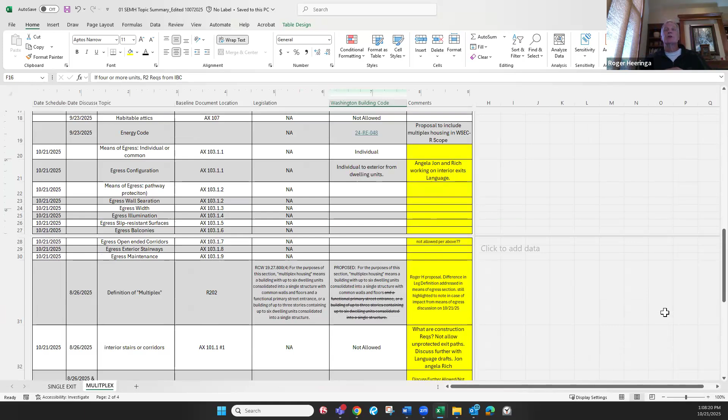That document was posted, and my suggestion is that we go through the goal, concepts, and issues that John and that group put together, and then we can go back and revisit the topics log, because I think we will basically knock off a bunch of those if we can go through the overall topics. Does that make sense?

So, John, would you be willing to walk us through that document if you bring that up, Dustin? Sure. John, would it help if you drive that, or you want me to drive it? It'd probably help if you drove it. I'm in a hotel room, so. No worries. All right, here we are. You want me to go, and I'll move around. Okay, thank you. Yes, and I will leave my camera off for the same reason, with apologies.

Okay, so the three of us sat down and discussed some of these already, and we have some recommendations included, but we looked at what we are trying to accomplish here. The original proposal had just exterior exit balconies and exterior stairs, and there was a desire expressed in one of the meetings that we include interior stairs as well. So we wanted to go ahead and figure out what we need to get interior stairs in addition to the exterior. But we still want to provide adequate safety, and at this stage, that's part of the question here.

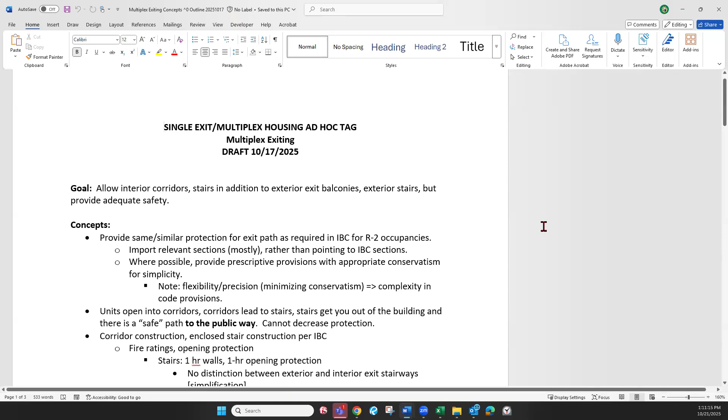What we are aiming for in that first concept is to provide the same or similar protection for the exit path as is required in the IBC for R2 occupancies, for apartments. We've only written a little bit of the language, and we ran into some questions and concepts that we figured we should get buy-off on before we actually start writing language, because that could save us a whole lot of time. That's what this document is about: exploring concepts and issues we need to decide before writing code language. So the concept is we're going to require exit paths as in R2s, and import the relevant sections rather than pointing to the IBC section, since that was an objection before.

That's part of the question, because it is going to add quite a bit. Where possible, we said we wanted to provide prescriptive provisions with appropriate conservatism, and appropriate is obviously up for discussion. But this would be much simpler. Otherwise, you start adding lots of language. If you want flexibility and precision and minimal conservatism, you increase the complexity of the code provisions. So one concept we'd like guidance on is: are we looking for maximum flexibility or maximum simplicity? You can write prescriptive provisions with some appropriately conservative minimum, and you just meet that. If you want to do something different, go to the IBC.

The next concept is a base concept for exiting in the building code: units open into corridors, and corridors are protected. The corridors lead you to stairs, which are even more protected, and then stairs get you out of the building. And different from the IRC, you're also getting a path to the public way. The IRC exiting provisions pretty much stop at the door, so we are anticipating incorporating some exterior pathway elements. And the idea is that you can't decrease protection. You can't go from a rated corridor into a protected stair and back into a non-rated or less protected corridor, or some unrated room. That's very much a base concept in the IBC.

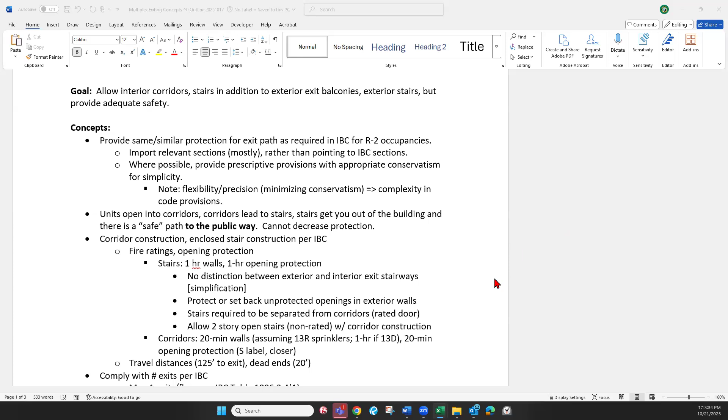Then getting to some of the details. Again, we're saying the corridor construction and enclosed stair construction is going to be pretty much the IBC provisions. So there's going to be some fire ratings. There's going to be opening protection for stairs. So here's one of the potential simplifications: all stairs are 1-hour walls and 1-hour opening protection, 1-hour doors. And we're not going to make a distinction between exterior and interior stairs.

And the simplification here is that with exterior stairs, you have to start defining how big are the openings, how exterior is exterior. And so in this way, we can also simplify some of the protection. But again, these are items for discussion. We're going to say for stairs, you're going to protect or set back the unprotected openings in the exterior walls from the property lines. So we don't want a fire next door blocking your exit. And there's something, we'll come back to that in just a sec.

We're going to say the stairs have to have a door between them and the corridor. Again, this is a simplification, or could be viewed as a simplification, and we can talk about some of the details of that. And then we're going to allow, as the code does today, 2-story open stairs that are non-rated, but they're corridor construction. So you can have 2 stories that are open to each other and only have corridor construction. You don't need the 1-hour stairs. That's something that we came up with in our last meeting with Rich and Angela and me.

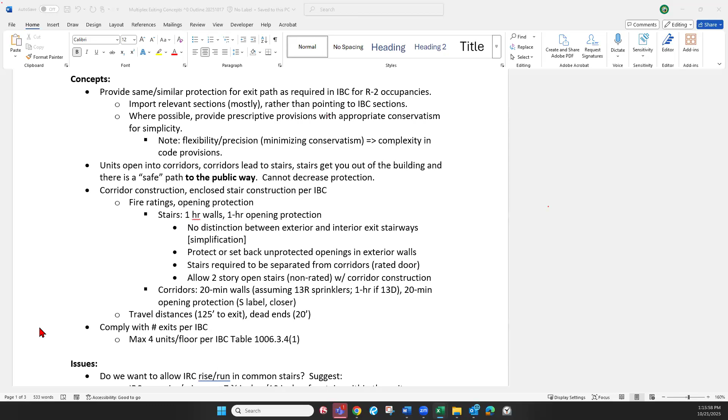And then the doors to the corridor, so these are your unit doors, we're saying are going to be 20-minute opening protection. And the S label means that they're tested for smoke, and they'll have a closer. And the idea here is that you're still trying to preserve the corridor environment. That's supposed to be what I call a pristine environment. So smoke-free as much as possible. You're going to obviously have some smoke on the fire floor because someone's got to get out the door. But once that door closes because of the self-closer, then the idea is that you don't get a lot of smoke in there, and you protect the other units from the smoke.

We're maintaining the current code travel distances of 125 feet to an exit from any point in the building. And then if you have a dead end corridor, that's going to be 20 feet long. The other thing is there's a little bit of discussion. Right now we're saying, okay, you just comply with the number of exits per the IBC. And that means it starts off by saying you've got 2 exits, and then you can have a single exit if you have a maximum of 4 units per floor and a couple other things. This kind of bleeds into the single exit discussions, but we are not proposing to refer to the single exit appendix at this stage.

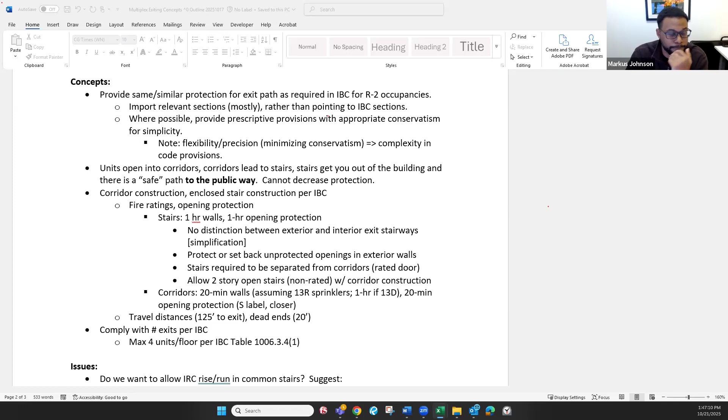Okay, Richard. Yeah, thanks. Just real quick. I had made a comment about, this is what an apartment building looks like, but I want to be careful to say that what we're really trying to do here is simplify the requirements of the IBC in terms of the way it's presented, right? And we're not trying to provide pointers to specific section numbers of the IBC. We're really trying to lay this out in a way that allows people to figure out what they have to do without always pointing back to the IBC.

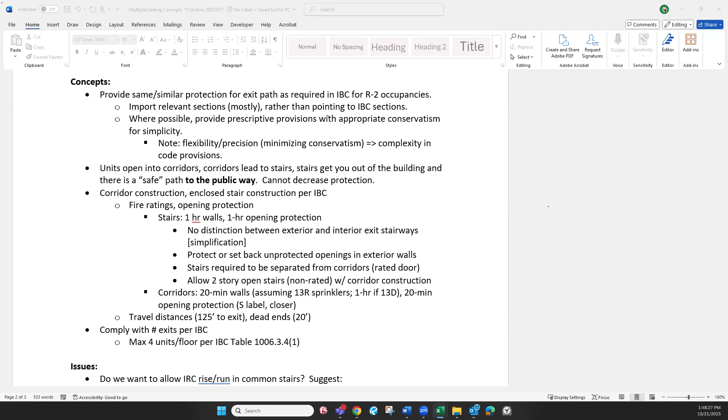And John, you might correct me on this. I don't know if we'll ultimately end up with some pointers, but we're trying our best to lay this out and provide language that's more aligned with what people are used to seeing in the IRC. Yeah, I think we're going to try not to rely on pointers as long as it doesn't get to be 5-6 pages long. Right. Okay.

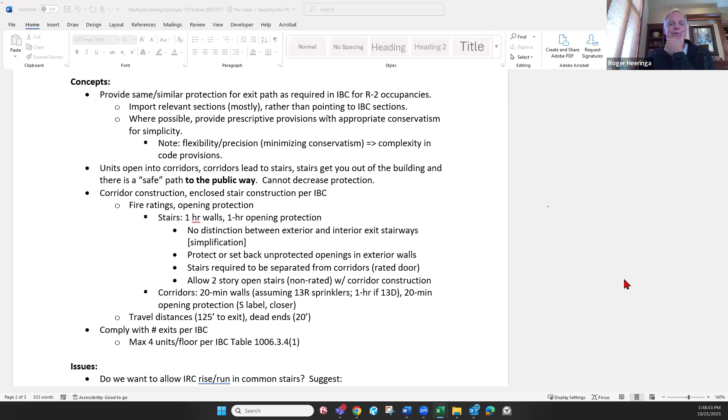I am curious what people think about how to proceed. I know there are 2 issues in here that do impact how we might go forward. One is the sprinklers and what was the other one? Common spaces. Common spaces, yes. I am wondering if we raise those 2 questions, have some conversations, and maybe make decisions on what we think moving forward.

Markus, go ahead. Yeah, can I suggest maybe we start with the common spaces, because I think we might have already settled pretty closely on the sprinkler requirement. I think we're saying that 13R is required in these buildings, or that's where we've been leaning in past discussions. I don't know if that's been finalized yet, but that's my memory. Yeah, I'm remembering the same thing. So I'm hoping we can finalize that. And yes, I was going to suggest we go to the common use spaces.

I know you sent an email, Markus, do you want to provide your thoughts on that? I actually don't have the email right in front of me, which might make this easier. But I did try to do some pre-thinking on some of the stuff I heard in terms of common space. Dustin, do you have that email? Yes, I'm pulling it up as we talk. If you guys want to keep it rolling, I'll pop it open. Okay. Cool.

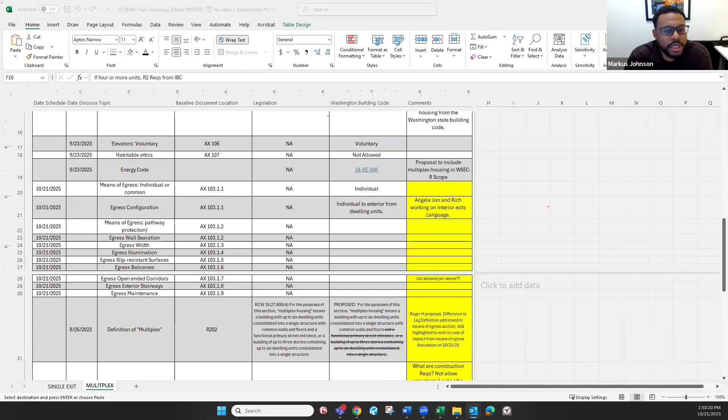So I tried to think through some of the types of common spaces that might have come up. Bike room or bike parking might have been one. Laundry room was one. Yeah, this is it. Thank you, Dustin. My initial opinion on laundry rooms is that common laundry rooms are just not built in newer multifamily buildings anymore. I live in a 320 square foot studio in a 54 unit building, a 2016 build, and I have in-unit laundry.

So it's pretty much common practice for new buildings to have in-unit laundry, and these multiplex units are going to be much larger than my apartment, so there's going to be space for that. Trash room could be up for consideration. I kind of think you could get away with all of these just not being shared, but I also respect the thoughts from previous conversations that trash rooms can generally be pretty small.

And, for example, in the city I live in, Seattle, it kind of requires 84 square feet for 2 to 9 unit buildings. So that's going to fall into this range. And so that's not that big of a space of building type of thing.

Storage room, again, my initial thought was just that these multiplex units are going to be quite large. I assume most of these are going to be 750, 800 square feet and more, essentially. So you're going to have space for storage in your unit type of thing. You're not going to be living in kind of the apartment that I live in.

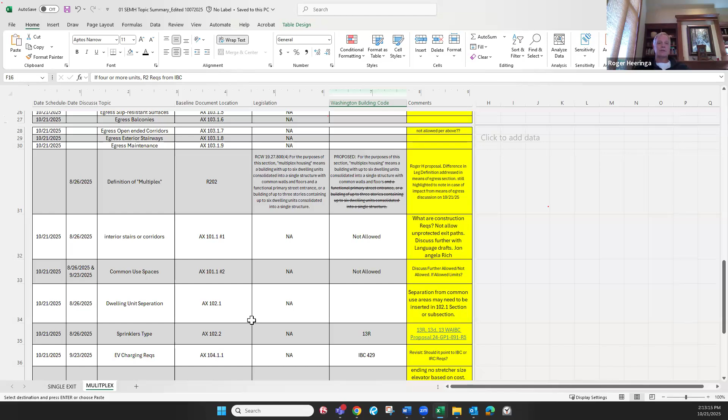So, yeah, real quick, Roger, I was just more worried about the outlets in the hallway, the exit passageway. Okay. Because if you have a 1 hour bubble and it's sprinklered, then you're containing it, and that's what we want. Yeah, no, it's just more about the hallways, because I've seen a couple of those, and that's the scary part, is when the hallway gets blocked with the fire. So no, if it's a protected trash slash bicycle slash mail room, that's 1 hour protected. Yeah, no, that's fine with the outlets.

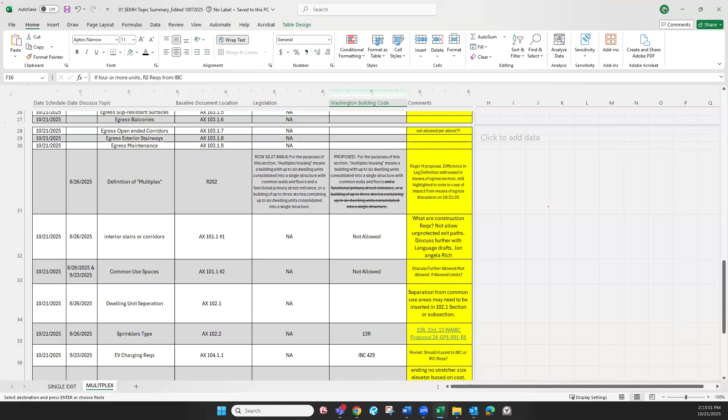Okay. John Sue? Okay, so I'm going to make your motion for you, I think. Would propose that we would allow those 4 uses. Laundry room, not storage. Laundry, trash, bicycle parking and mail. Right. To be included in the building, and those are the only uses other than residential that would be allowed within the building. With a 1 hour bubble around them, and we can figure what the details look like. But the idea is a 1 hour bubble.

time. John was correct in saying doors get propped open. And I'm just picturing that this door is going to be propped open most of its life, because people are delivering packages. They're trying to get their bicycles in and out of a door that's self-closing. It's self-closing and latching because it's an opening protective. Are people comfortable if this door is no longer self-closing and latching, or if it's propped open? Because most likely it probably will be.

John Sue? Yeah, Jeremy, I think the unfortunate reality is also the stair doors can get propped open too. You see that all over the place. Fair enough. I'm not sure this is a whole lot different.

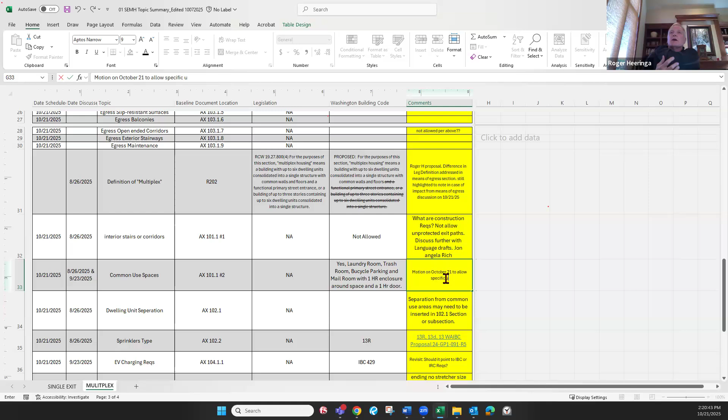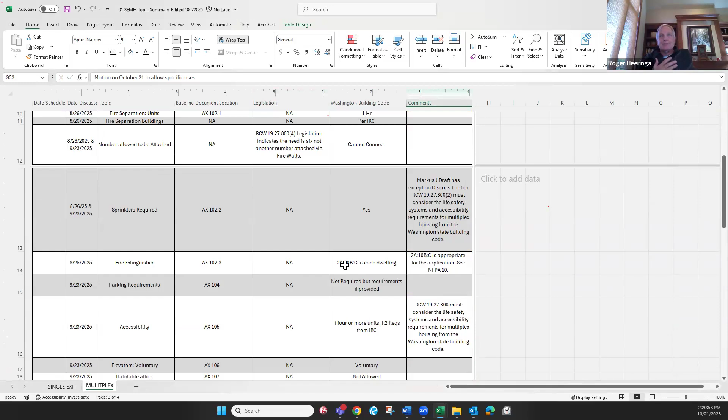We did talk about it 2 meetings ago, and I think that, I don't know, Dustin, if you remember, I remember, like Markus, that we had talked about it and thought we had decided on 13R, but we wanted to leave it open and have some additional discussions about it. And there was proposal 24-GP1-091 revision 5. Dustin, is there any way you can help us frame the conversation a little bit? We can. For the sprinkler stuff, looking at our line here, we have it, yes,

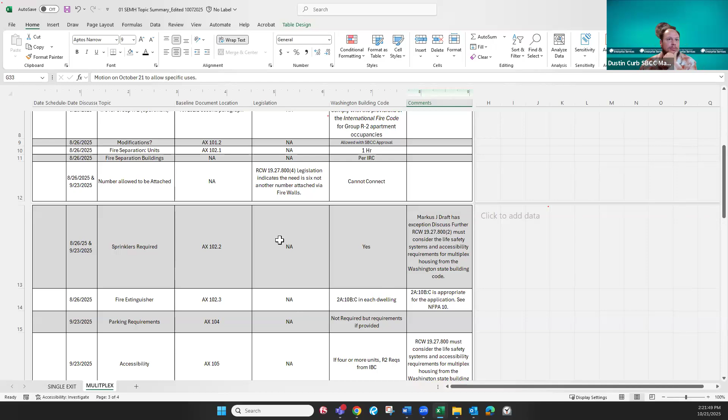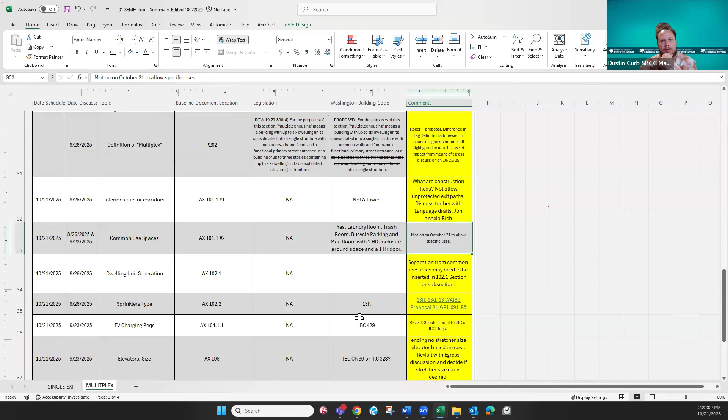I'm speaking based on the notes here. I guess our draft has an exception. Or, no, our draft doesn't have that exception in there. I do seem to recall, though, that we were leaning towards 13R systems over the full 13 systems. And beyond that, framing where we're at, I'll pause a little bit for Markus to speak and I'll keep on looking. Here's our sprinkler type. We've got 13R in here, but to check this proposal, let me pop it open.

Yeah, that's what I was thinking. So we've all agreed that it needs to be sprinklered. That was the yes, we agree that it needs to be sprinklered. There was still a discussion about whether it could be 13R, 13D, or if it needed to be 13. I think that we have it in there as 13R. The proposal is allowing a height increase for 13R systems up to 60 feet. Okay.

I think I understand 13R and 13 systems, because we talked about it on the single exit. Can somebody remind me what 13D is? It's for single family residences only. Okay. So it sounds to me like it would be 13R or 13. I don't think we would want 13D, but Markus, go ahead.

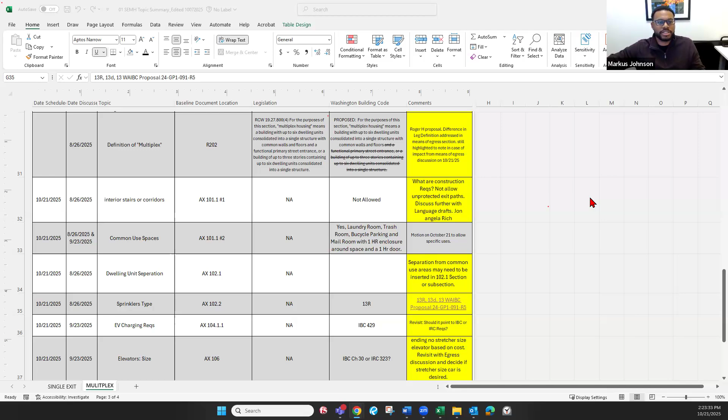Yeah, I don't know if this is exactly why it was still highlighted yellow to come back to. I feel like in the last meeting there was also discussion around a proposal saying that townhomes could do 13D, or 13D would be allowed in other circumstances where it's currently not allowed. I don't remember the exact details, and I'll let Mike fill in, because I think that triggered a memory there. Yeah, that was our conversation. I'll pick up on this one for you.

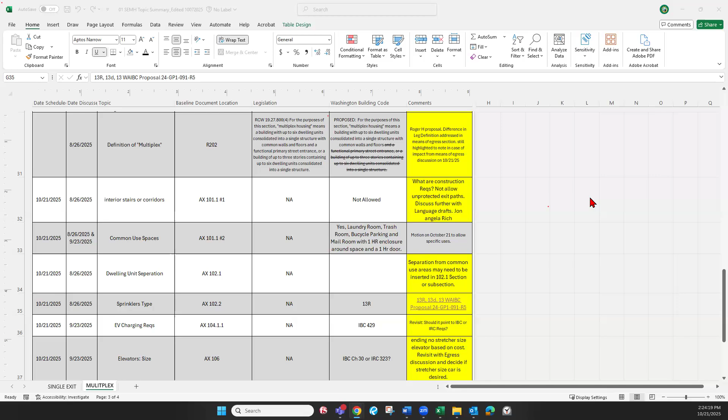When you're doing the townhome environment, with 5 units plus, you can stack them, and 13D is completely appropriate for those townhomes, because we look at each individual townhome as a 1 or 2 family occupancy. When we move into the multiplex like we're doing now, we start stacking those occupancies one on top of each other, and we need to move to 13R. I want to say that's what you're referring to, and if that's the case, you hit the nail on the head. That's exactly what we had mentioned. Okay. So given that, can I get somebody to make a motion that we require a 13R?

Jon Siu, so moved. Thanks, John. Can I get a second? Messer will second. Thanks, Mike. Any other discussion? All right, all those in favor say aye. Aye. Aye. Anybody opposed?

Okay, I am going to suggest we take a break until 2:35. We're about halfway through our meeting. Dustin, I think either during the break or right afterwards, let's go through our list here and kind of see, well, I guess maybe we need to go back to John's egress summary and kind of wrap that up. And then we can revisit all of the issues that are outstanding, the issue log, to see what's outstanding that we maybe haven't addressed by that.

So when we get back at 2:35, we will go to the document that John sent and walk through that and see if we've covered everything, or see if we can tie that up. So let's take a break for 10 minutes.

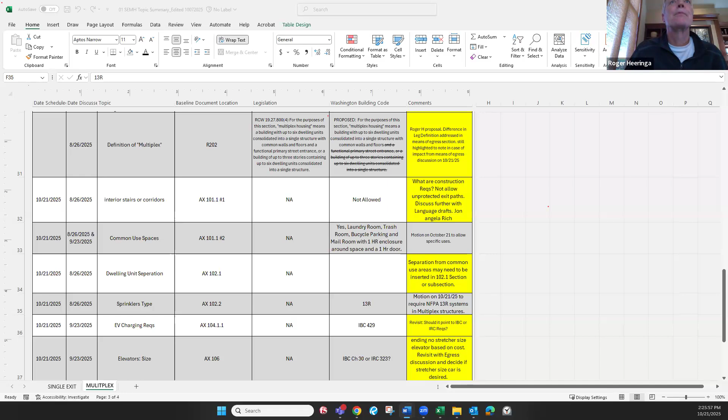For anybody that didn't have their sound on, the meeting is back in session. I'm going to ask Dustin to take a roll call just because this is a meeting where we're starting to take votes. So Dustin, if you can go ahead, and I am here. All right, give me one moment. I'm priming up my roll call sheet here. All right, Roger is here. Dan Young. I see him online. I'll return. John Hall. Present. Thank you.

Joe Mayo was not here earlier, sorry. Andy Lorenz was not here earlier, and I'm not seeing him online. David Kinley was not available. Jeremy Moore. Present. Thank you. Jonathan Goldsmith. Jonathan, I think I see you online. All right, I'll return. Robert Baglio was not here for the original roll call. I'm not seeing them online. Michael Wright. Present. Thank you. Jesse Bank was not here for the original roll call, and I'm not seeing online.

Shweta Sinha. Here. Thank you. Mike Messer. Present. Thank you. David Lynham was not here for original, and I'm not seeing them online. Rich Geisky. Present. Thank you. Spencer Gardner was not available for the meeting. Derek Weigel. Derek, I see you are unmuted, but I'm not hearing you. I'll come back. Richard Williams. Here. Thank you. Jon Siu. Here. Thank you. Going back, Dan Young. Oh, there we go. Unmute, and then I'm here. There you go. Jonathan Goldsmith. Present. Thank you. And with that, we are sitting pretty with a quorum.

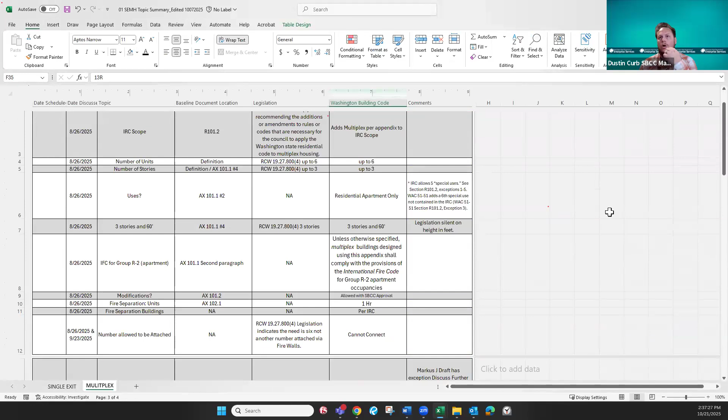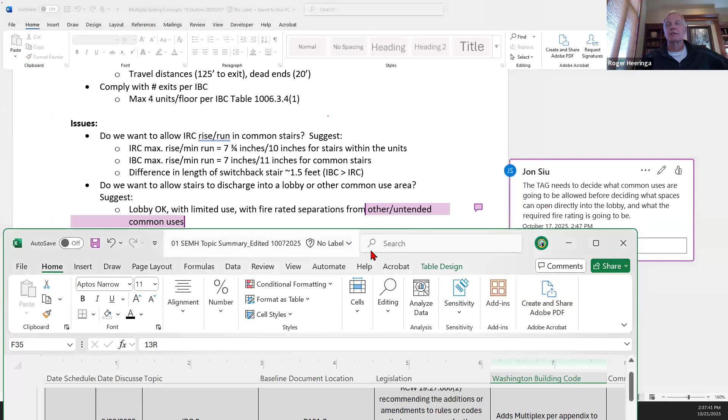All right, if we can pull the ad hoc document that John sent out, bring that back up. And I think we'll start at the top and walk through it. I was looking for John's document, the concepts and outline. Oh, apologies. Yeah, I've got it. It's just not open up yet. And I think we will just walk through it again. And John, actually, if you could go through it, given our last discussion. I think the intent would be, if you have a question or a concern about a topic, raise your hand, and we will work through that.

With the idea that at the end of this, this document will be semi-approved, knowing that we're going to go back and create the language at the bottom, so it needs to be moved into actual code language that we will address at the next meeting. So I'm not sure that we're necessarily going to ask for a, well, we'll see if we feel like we need to have a vote if there's a controversial topic.

So John, would you be willing to walk us back through now again? Sure. Yeah, that works. And maybe at least for our purposes in writing this, unless we hear strong objections and need to take a vote, I think we can work with not silence is consent so much as if we don't have any objections, we'll just move with it and see what happens. Okay. So I'm not certain, do you want to go through the concept as well or just the issues? Probably not. I see some of the things, like the fire ratings. Okay, and the sprinklers are down there in the corridor, so. Yeah.

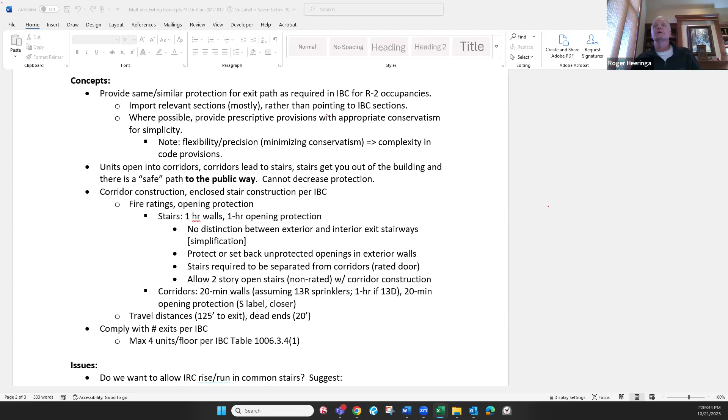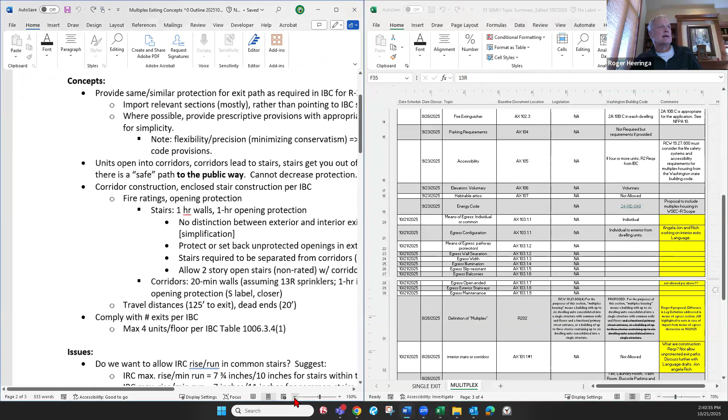And John, I was going to go back while he's doing that. I don't know that we resolved, you had mentioned the difference between the IRC and the IBC as far as a safe path to the public way. Mm-hmm. That's the second bullet. Yep. Again, thinking that right now under the IRC, we can do 4 units in duplexes. Is that correct? What do you mean 4 units duplexes? Well, I'm trying to compare what we can currently do in the IRC and what we're now asking to do in this with the multiplex, and confirming that we really think it's important.

Because what you're suggesting with the path to the public way is we are making requirements outside of the building. I think that's what you said. Yes. Pathway. And I guess I'm curious again, thinking about going from the IRC with what we can currently do to now you have 6 units. I don't think that 3 floors matters one way or the other. But we're going from, I think in the IRC, we can do 4 units, and now we are going to 6. Is that jump critical that we start defining what happens to people after they leave the building? I'm curious, raising the question.

Yeah. I don't know about the 4 units. I mean, if you're talking about townhouse units, they all each have their own exit and they get out. Single families, you're assuming that they're still on their own property and they get out, and again, it's only they that affect their own exit path. Generally with these types of buildings, you're going to have a shared exit path, and not only getting out of the building, but having to get somewhere away from the building. And that's the concept in the IBC.

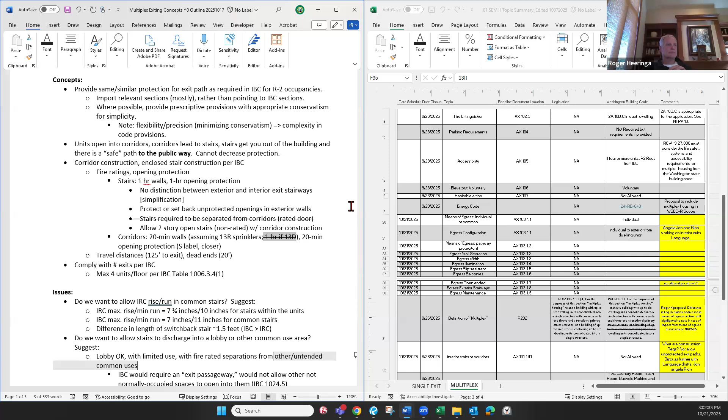Okay, I've made some notes on that for my purposes anyway. So we'll have to figure out how we make that clear. Generally, the sprinkler stuff doesn't appear in the exiting section, so when we do the part that says you're going to use a 13R, maybe it should get inserted there. And Ken, to your question about have we seen what Vancouver is doing, I have not seen it myself, so that'd be something good to know. I'll email it to you.

Okay, thank you. Jonathan? So if the 13R system requires it in the NFPA, why would we need to restate the installation standards in the code? Wouldn't it already be in there that it has to be done? Sure, I mean, that's a possibility.

It depends if we want to head off an interpretation issue. So again, thinking about that picture that Marcus threw up there, is that a corridor? Is it a balcony? Is it something else between the unit doors and that stair? Or is that all part of the exterior stair? Someone could certainly argue that, right? It's all open, so you rate that as the exterior stair, you rate the doors as if it were all part of the exterior stair. So maybe I'll ask the question of the fire guys. If that's all the stair, then do you still get the dry head over the unit doors with 13R?

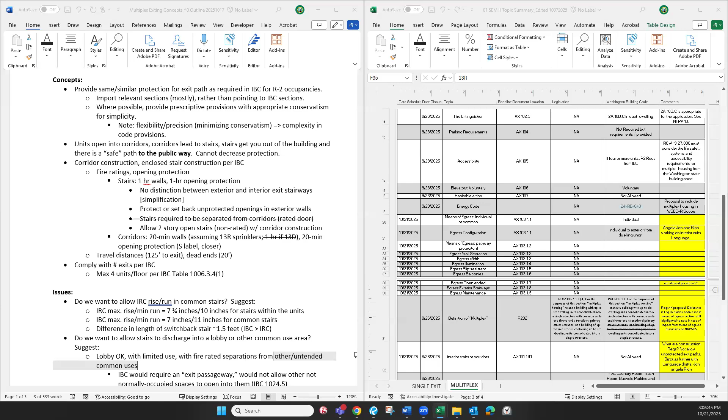Okay. Not hearing or seeing any questions. Derek. Oh. Derek, you got your hand up? Yeah, I think we were having trouble hearing him before. You're off mute, but we can't hear you. All right, try that. There you go, I got you. Haven't talked enough in the meeting, I guess.

Oh, that just gave me some clarity on the max 4 units. Was there a thought, or am I confusing this meeting with the other meeting where Marcus had said, hey, instead of doing max 4, what if we did 6, but you can't go up as high?

That was the single exit. Okay. And it was, if we limited it to either 20 or 24 units, you could do a four-story with 5 units on a floor. Yep. So I think that was a single exit. Okay. Yep. All right. That's just clarifying.

Thanks. Mike, go ahead. Hey, sorry to circle back to the sprinklers, but I was just looking everything up. So from what Ken said, if you go to NFPA 13R, and I'm looking at the 22 edition, since that's what would be codified for our 2024 building code, 6.6.5 does exempt stairs, but if you go into the enhanced contents of the NFPA commentary, it gives some pretty clear direction on what is open and what is not.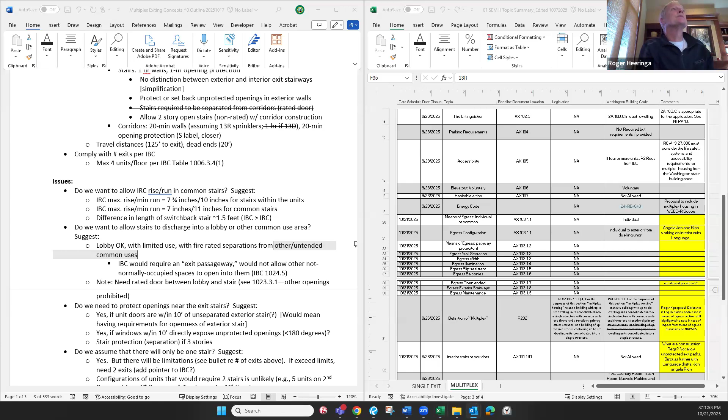Yeah, I'm in support of the way they have it here on the document, where the common stairs are the IBC rise and run, with the increased occupant load using it, and that it's going to be the main discharge, the only exit in an event. I'm in favor of the way it is with the IBC stairs for the means of egress for all units, but having the IRC stairs in the unit. And it does reflect the way the wording is for R2s in the building code.

But, yeah. Again, back to my comment, it wasn't a deal killer. It's just more of a preference. Like if I was building, I'd want the IRC ones, but it's not a big enough deal. Okay. Also, Derek, you're thinking about if you're coming to visit somebody, but if I'm a fireman coming to a multi-family, I'm expecting a more commercial stair and I'm carrying stuff up. So, yep.

Okay. All right. I'm going to consider that one okay. Let's see. Let me make my notes here.

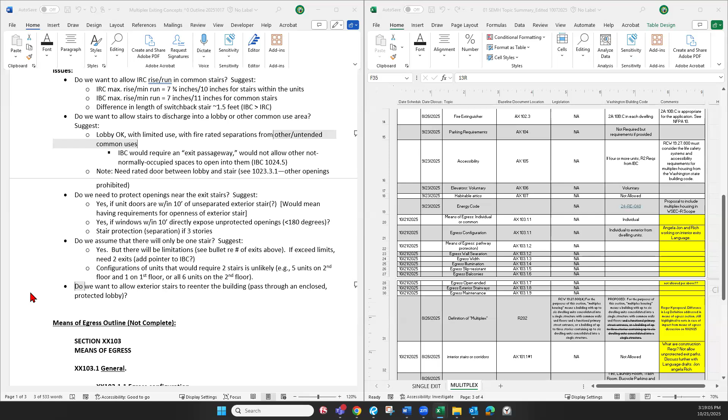Well, my personal opinion would be to leave it so that you don't want them to go through. I want to make sure I'm not getting double negatives there, but don't re-enter the building. Yeah, that's my personal opinion. Okay.

So, John, you've got your direction. You're going to take this and kind of fill out the sections below, you and your work group. Yep. And a reminder, it'll be December 4th or something like that when our meeting is after Thanksgiving. Okay. I would ask if you've got it, certainly get it to Dustin. We'll distribute so people can take a look at it.

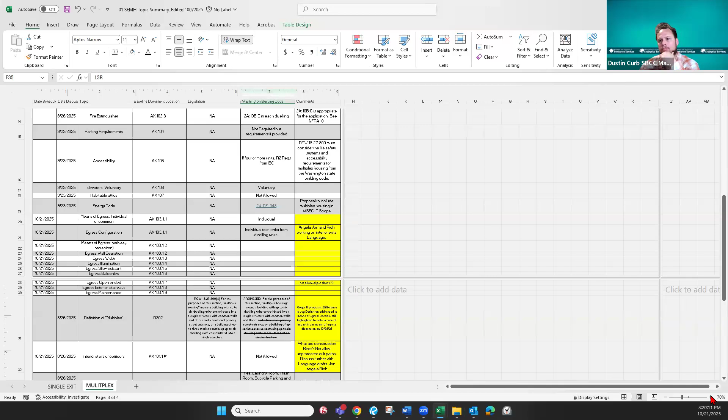Sure. So Dustin, let's go through the document on the right and just see if there's anything in there that we don't feel like we've addressed. So all this stuff, oh, here, let me make it larger. Yeah, please. Thank you. All right, so anything that we don't have marked as yellow, we are identifying as kind of resolved.

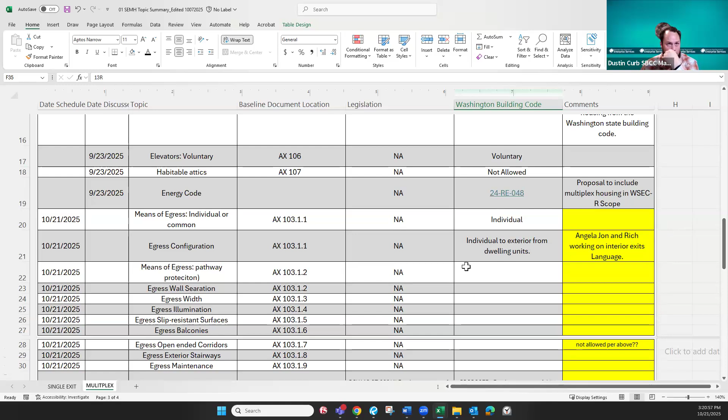Coming in for the stuff that we had scheduled for today on the 21st, is primarily means of egress. With the discussion today, my notes might update that. We're looking at having common egress paths, so we would need some language update. We don't need to make any motions or direct anybody to do anything. I think John and that work group, Angela and Rich, are capable of providing some updated language for us to discuss in the future. So most of this egress is on its way to being resolved, but that'll be our next multiplex meeting.

Dustin, can I just clarify for myself? So we're showing 103.1, 1, 2, 3, 4, 5, 6, 7. Are those the numbers that John should be using? Yes, that was the number. So when he comes back, at the bottom of this document he's got the framework for where he thinks things are going to go. And there's some new sections that aren't included in our baseline document that they'll be coming back with, and they'll adjust the numbers appropriately. Okay. Thank you.

We haven't finalized our definition of multiplex on this one. I think that probably gets finalized as we round out everything we're discussing below the multiplex appendix topics. We've got more egress components, interior stairs or corridors. We've been talking about dwelling unit separation. We don't have that finalized, but we talked about the common use areas. The motion made was that common use areas are allowed in the specific types, enclosed with a 1 hour enclosure. And we clarified further that the 1 hour door would be required there. So we could update this one today.

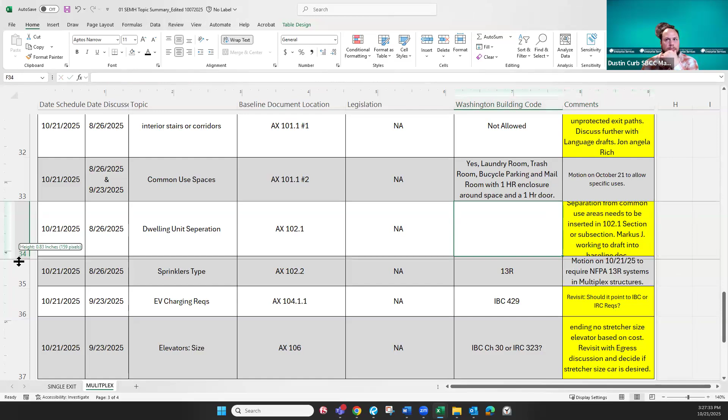Okay. Sprinkler types we resolved here today. EV charging requirements: should we point to the IBC or let the IRC baseline requirements drive that, or potentially a separate requirement for the appendix? So we have EV charging, elevators, braced wall panels and structural questions, and then fire separation distances if not attached, as the things that are on our list yet. So let's go ahead. The EV charging,

I'm not sure that I have pulled that up for a while. What are the requirements in the IRC? Do you know, Dustin? In the IRC, if there is a garage provided, a circuit is required to be installed in there for charging apparatus. And my question for those more familiar with multiplexes: do they typically have an attached garage? I don't think we're anticipating that. And is there a need for potential on-site EV charging to make us compliant with the other statutes that any new building constructed shall provide for EV charging?